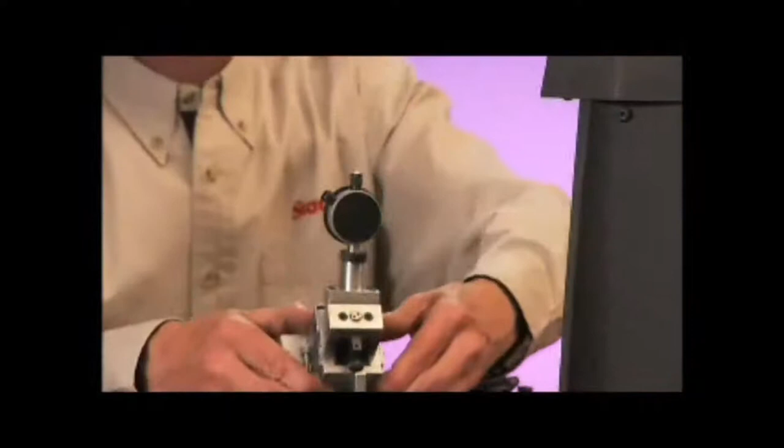The company was founded in 1880, 129 years ago, and we're very proud of our American heritage. Our reputation from Athol, Massachusetts, is known throughout the world.

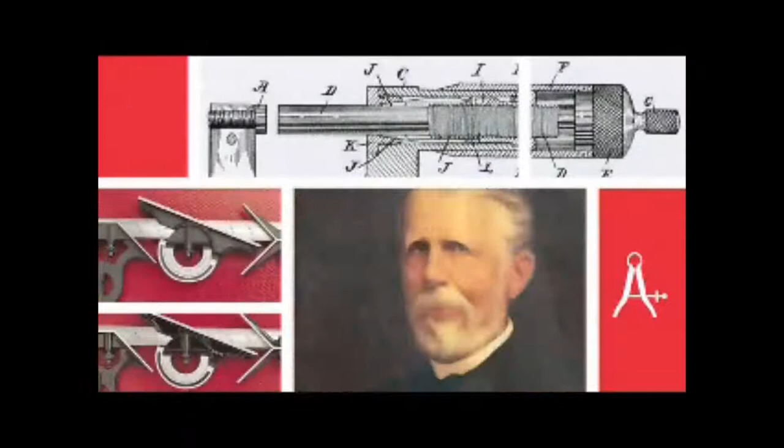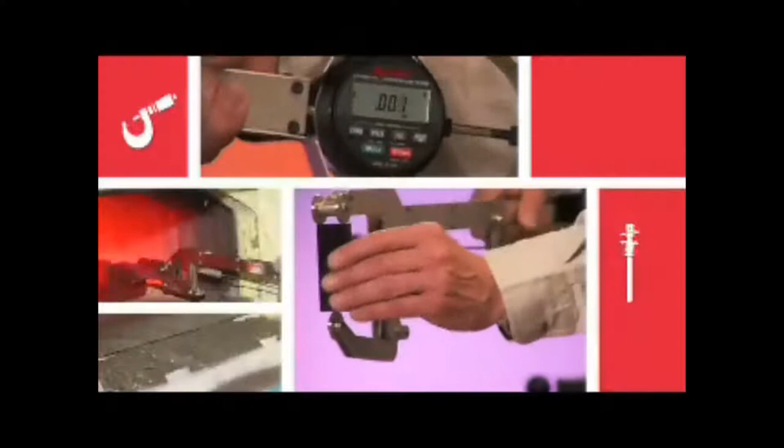The founder, L.S. Starrett, was able to produce many tools that had broad applications, but he also recognized that many people had specific applications that needed to be solved on the shop floor. So it's in our DNA to solve problems.

We think our special gauge division and our special order division set us apart from our competition because we're going to provide specific solutions for our customer base that none of the competition can do.

You need a lot of experience to build gauges. If a part tolerance is 1,000th, the gauge tolerance is 1/10,000th. Sometimes it's down in 20, 30 millionths of an inch. Over the past 50 years, we've done probably 25,000 gauges out there, and they're all unique.

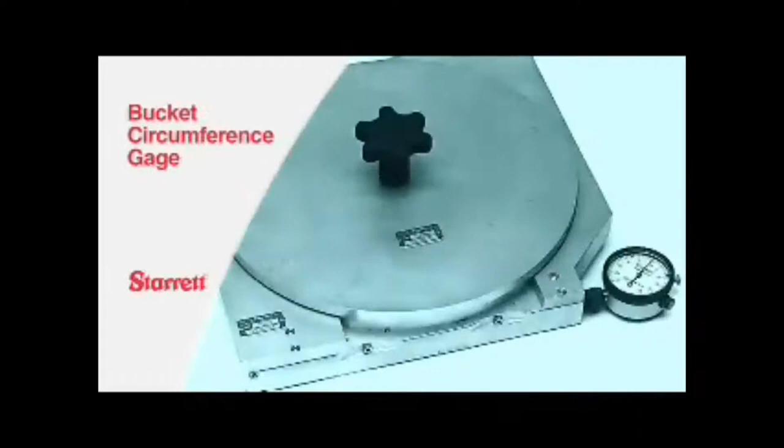There are very few industries that we don't touch. People ask the question of what do we measure? And I tell them just look around.

A hamburger company calls and needs to know how thick a hamburger patty is, and the next minute it's somebody calling regarding ICBM missiles. Anything they can see around them, we've had calls on and we've made gauges for them.

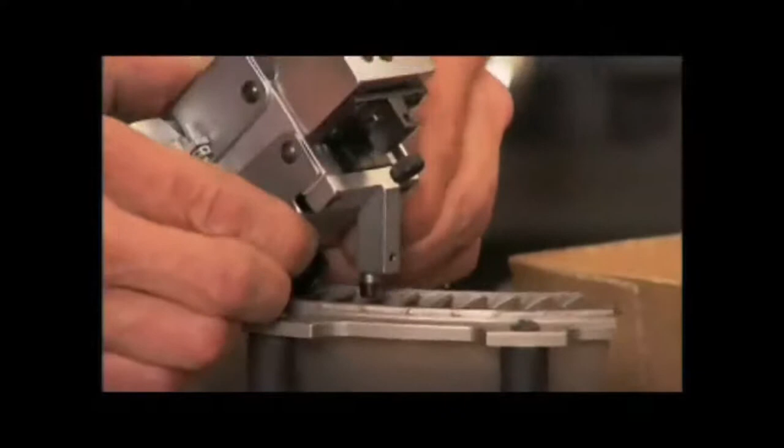Aerospace is number one. Area flow gauging, make sure that the engine is balanced. Medical, knee joints, there's a lot of different measurements that have to be taken there. Military, body armor, they have to be a certain shape, fit certain size people.

Food containers, ice cream containers, coffee cups. You have to make sure that lid's going to stay on with hot coffee. We really are touching anything and everything in the manufacturing world.

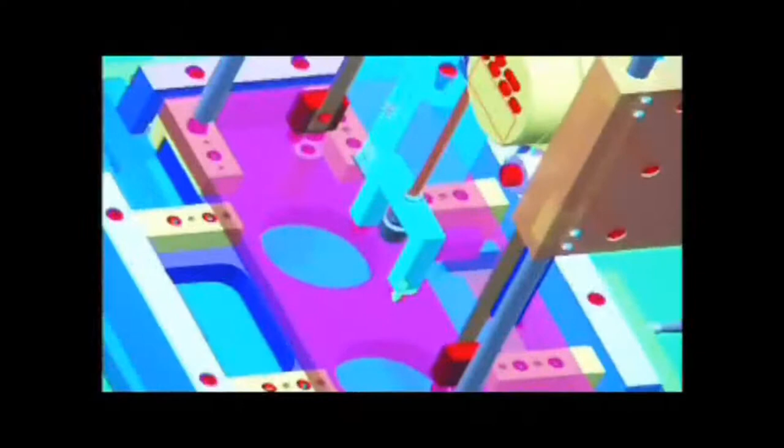Today, with computers, the internet, we're able to touch so many more people through technology that we're really able to turn design gauges around quicker. We can get a much more accurate feel for what is needed in a much faster time frame.

It's usually like a quality engineer at the companies that will call. They know Starrett. They've got plenty of Starrett tools in their facilities. They like them, so they call us. The first thing they want to know is, do you do special gauging? And we say yes. We come up with custom solutions all the time.

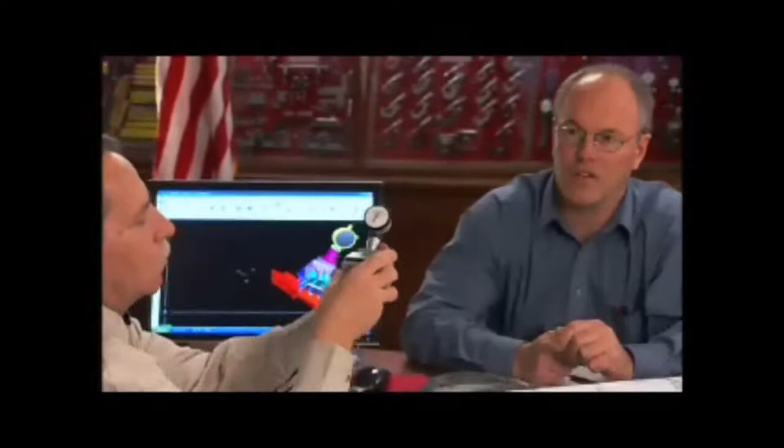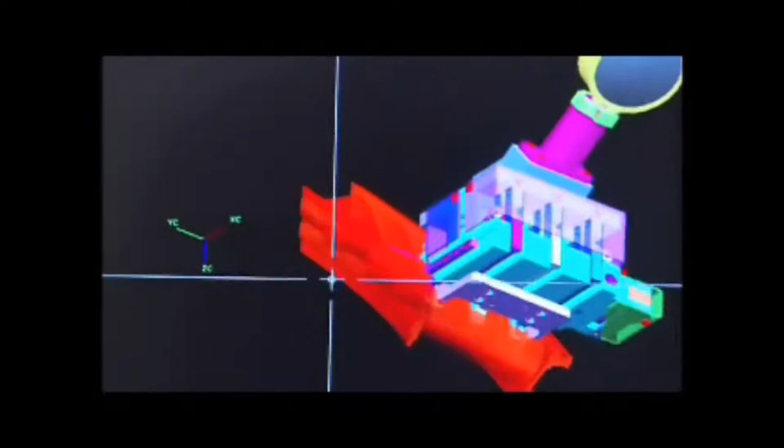Our people understand it's important to make sure that all the design features and what they're trying to accomplish is clearly understood on both sides of the table. We won't provide a quote until we're sure that we thoroughly understand the best way to solve the problem for the customer. So it's a lot of back and forth, phone calls, sending sketches back and forth, CAD files that we can actually interrogate quickly, design around. Are we on the right track in the design process?

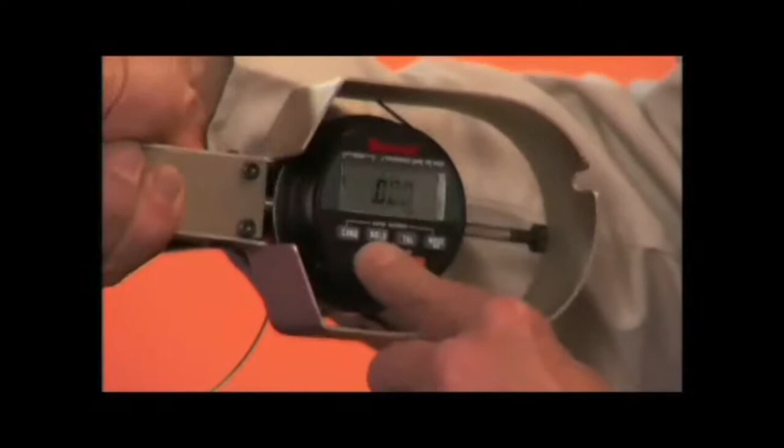A lot of our gauges nowadays, people want to have access to the data and not use cables. So we have that ability in a lot of our gauges. And a lot of time it's a trip to the customer to actually see the application. There's nothing better than face-to-face communication to tie down all the little idiosyncrasies that go into these gauges.

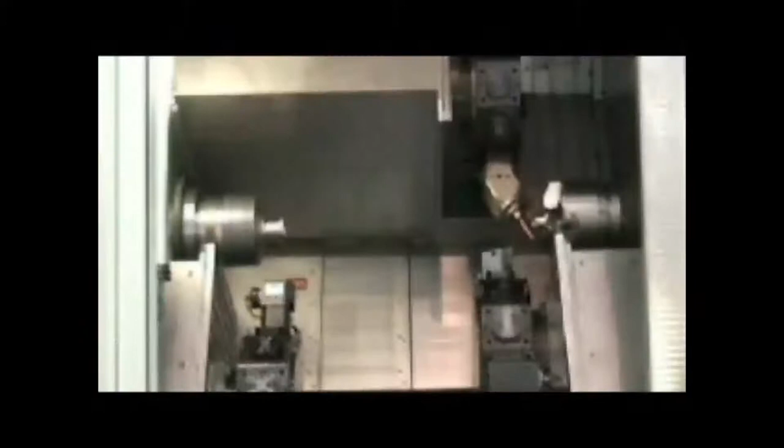Pricing is a fixed price right up front, and we usually abide by it. Sometimes we run a little over, but we don't pass it on to the customer. And before we will build anything, the customer has final approval. Once it's built, it will go through inspection.

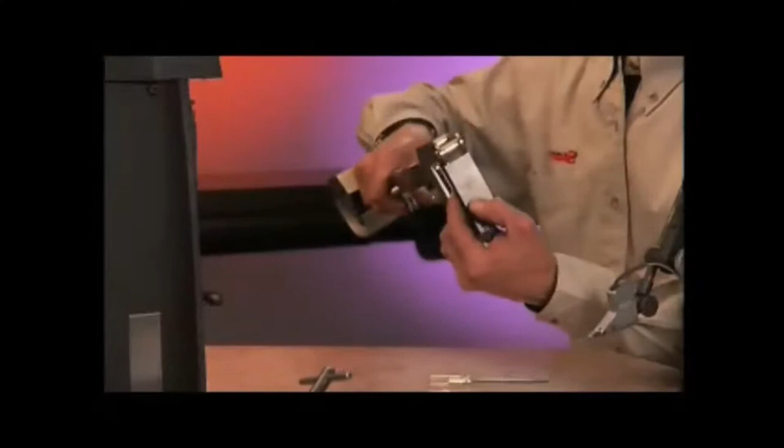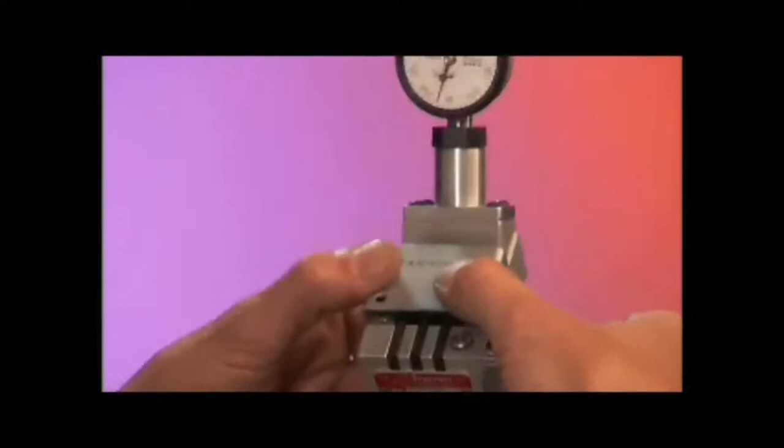Most of our gauges have masters, and they duplicate the part just precisely. And for certain applications, then we fly back and instruct the customer on exactly how to use the gauge properly and provide documentation that if somebody walked in and didn't know how to use the gauge, they would know how by just reading the documentation.

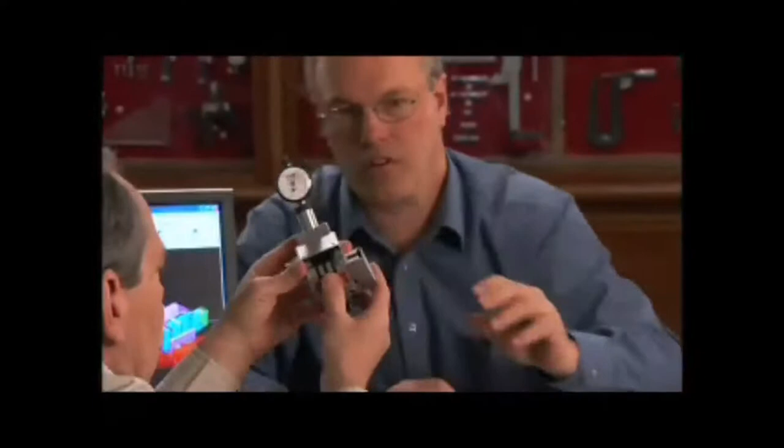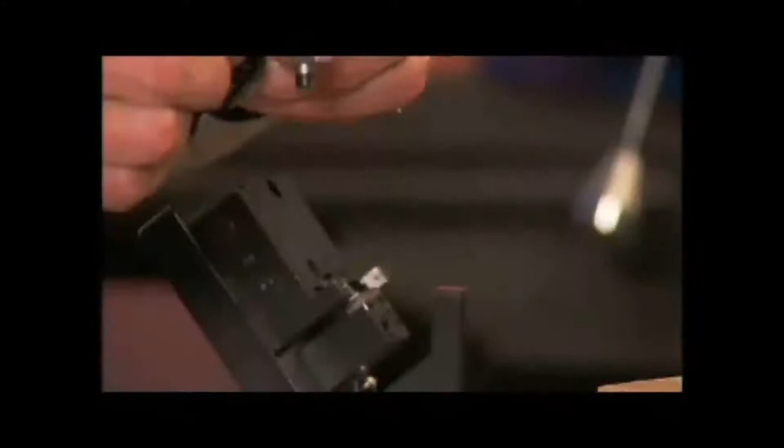So the rewarding part of special gauging, L.S. Starrett would have been very proud that had taken his philosophy, go into customers, talk engineer to engineer, to understand the problems that they're having, and to come back, put pen to paper, be able to have a continual dialogue in coming to them with the best solution that we can provide at the best possible price. And that's the crux of what we try to do here every day.